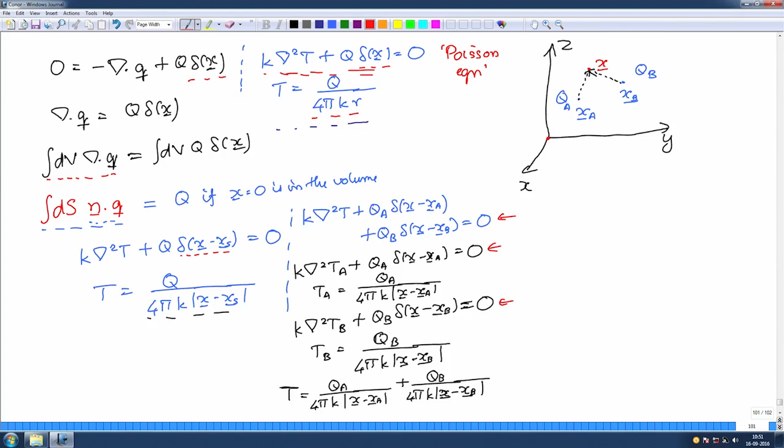We had considered a specialized kind of source, which is a point source. That point source is located at a point, the volume of which goes to 0 in such a way that the energy generated per unit time is a constant. So, a source whose volume goes to 0, and if the energy generated is a constant, the flux has to go to infinity.

We had defined the delta function previously. The delta function is defined such that delta of x is non-zero only at x equal to 0, and it is equal to 0 everywhere else. The integral of this delta function over the entire volume has to be equal to 1. So it is an idealization of a function which is non-zero only at the origin, where x is between minus h by 2 and plus h by 2, y is between minus h by 2 and plus h by 2, and z is between minus h by 2 and plus h by 2, and within this region it has an amplitude of 1 over h cubed.

There are other ways of expressing the delta function as well; this is the simplest way. However, regardless of how you express the delta function, the solutions that I get for this delta function end up being the same.

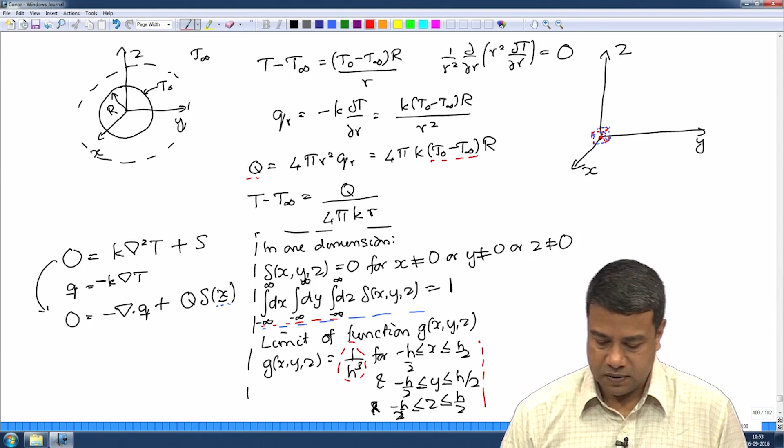So I showed you that if we have an equation of the form k del square T plus q delta of x equal to 0, the solution of that is temperature equal to q by 4 pi k r. So this temperature field is the solution for the Laplace, or rather the Poisson equation - a Laplace equation with an inhomogeneous term. I had shown you that when the source is at the origin, you get q by 4 pi k r, where r is the distance from the origin.

When the source is at some other location, you just have to take the distance of the observation point from the source point, the vector distance - that in this case was equal to the magnitude of the vector x minus xs, where x is the observation point and xs is the source point.

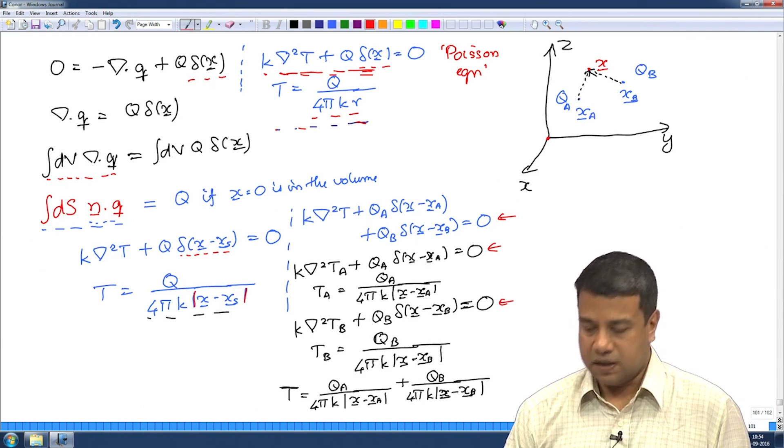I had shown you superposition. If you have two different sources, you can find out the temperature due to each of those sources individually and add them up, and you will get the temperature due to the two sources together. That works only when the sources are in the form of delta functions, when you have point sources of infinitesimal volume. In general, if you have sources of finite volume, that principle does not apply in general.

You have to keep the solid boundaries the same. So therefore, this source of the delta function type is a special source, and that is the reason it is useful for getting these equations.

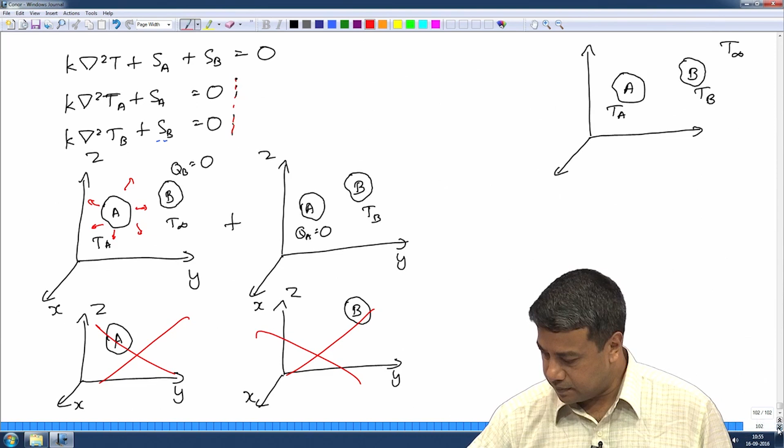So I showed you that for two sources you can get a solution by superposition. Now, what if you had some volumetric source? You had some region in space where let us say some reaction was generating a certain amount of heat.

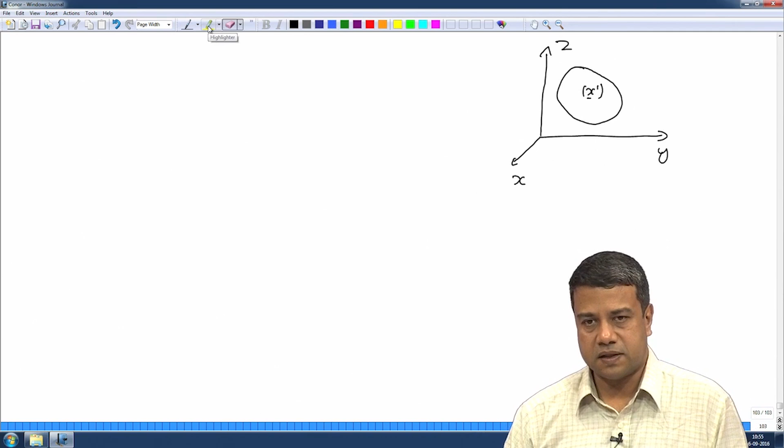That heat being generated per unit volume, per unit time, I will consider as q of x prime. I should be careful here because I have used capital Q for energy per unit time, so rather than using that, I will use a different notation: I will consider this as some source S of x prime, that is the energy generated per unit volume per unit time.

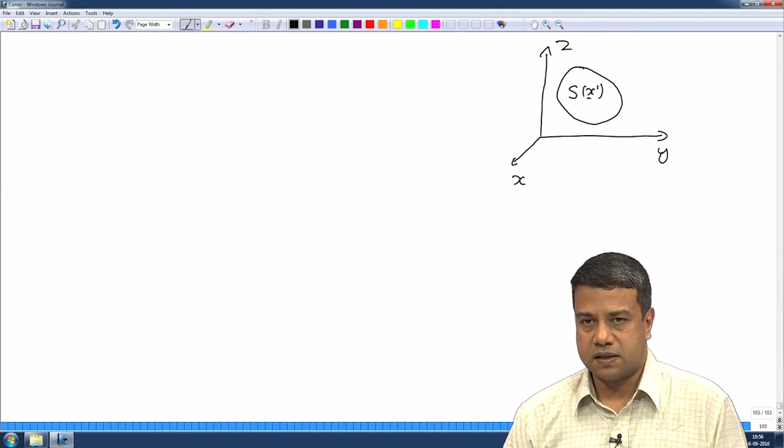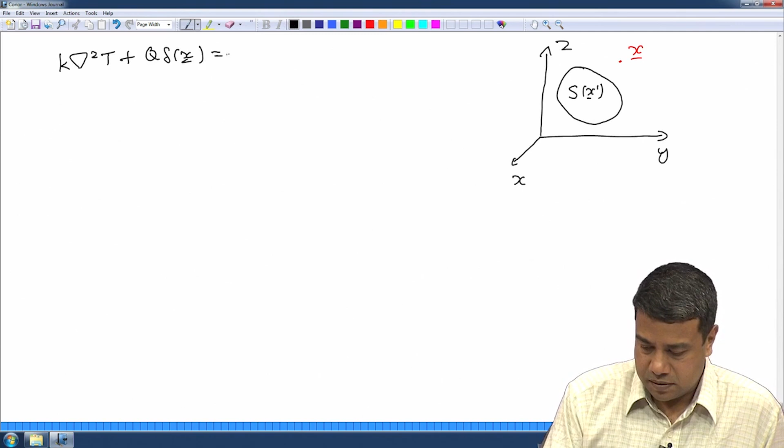And I want to find out what is the temperature at some observation point x. That observation point could be within the source or outside, it does not matter. So how do I do that? I already have a solution for a point source. That solution is T equal to Q by 4 pi k - let me write this as a source point.

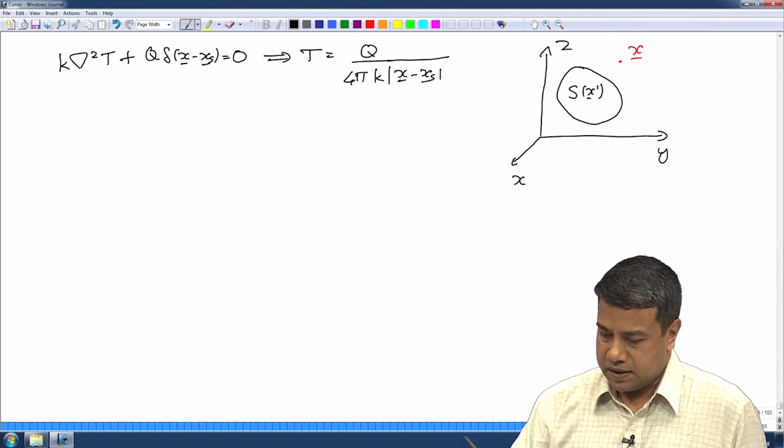So, that is the temperature field for this. What I can do is take this object and divide it into a large number of small volumes.

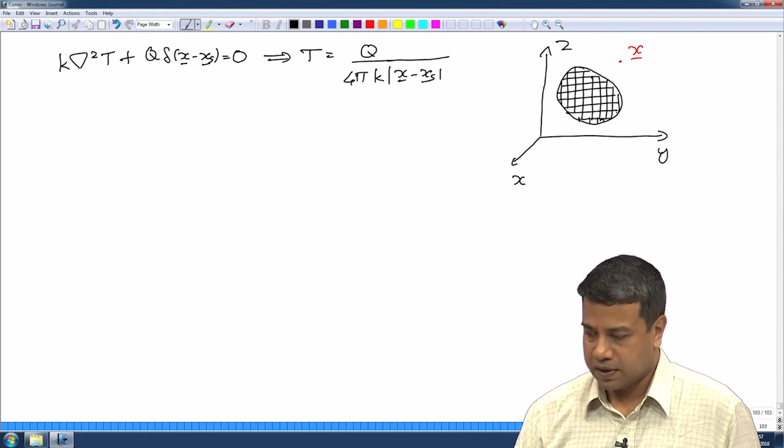The volumes can be defined with centers at delta V1, delta V2, etc., delta Vn, divided into a large number of volumes. I label them as 1, 2, 3, 4, 5, etc. The centers are at locations x1 vector, x2, up to xn.

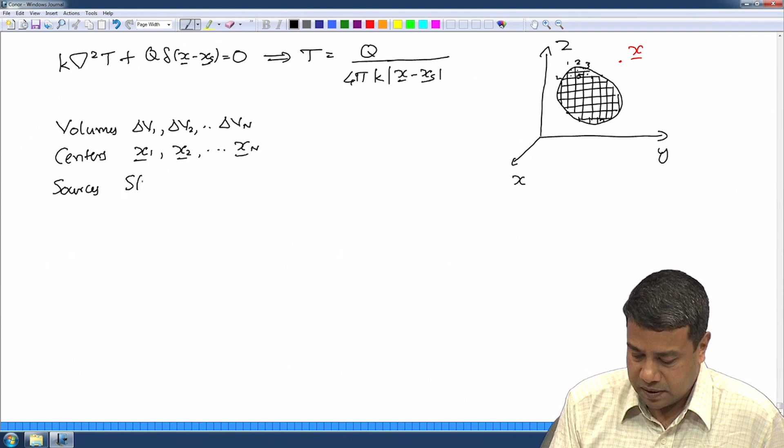So, the sources within this volume are going to be of the form S at x1 delta V1, S at x2 delta V2, S at x3, and so on.

So, those I can consider to be point sources at the centers of each of these volumes. If the volumes are small enough, the fact that you are combining the entire source at its center does not affect the problem, because the extent of the volume is much smaller than the distance from the observation point of each of these. So, this is effectively a point source.

Once I have defined it this way, I can straight away write down the total temperature field. I just have to add up the temperatures due to each one of these point sources. So, the total temperature field will be equal to summation over all I equal to 1 to n of delta V I into S of x I.

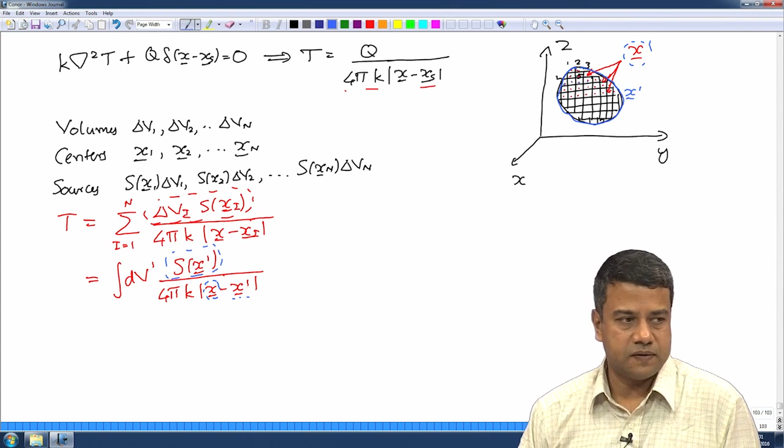Here x is the observation point, and x prime is the source point, the location on the source. You are integrating over x prime, which is over the entire volume of the source. This s is a function of the source point, and the integral is over the source point, and from that you get the value of the temperature at the observation point x.

So, provided the source is specified, you can get the temperature field at any observation point by using this expression, for any distributed source, for any finite object. So recall that we started off trying to solve for the temperature, k del square T plus S of x equal to 0. That was the differential equation for the temperature we were trying to solve, the Poisson equation with an inhomogeneous term. Using this delta function construction, we have managed to get a solution for that.

T is equal to the integral dv prime S of x prime by 4 pi k into x minus x prime. This is an integral relation. This gives us, on the left side, the temperature at the observation point x as a function of the source location and the source strength, for a distributed source. So this is effectively the integral equation that corresponds to this differential equation. There is a solution of this differential equation, and you can use this formulation to find the temperature due to any source.

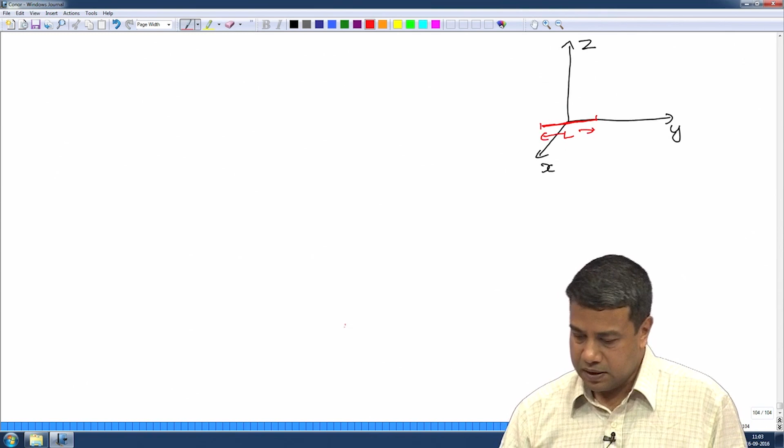Okay, so if I have a wire of total length L, extending from y equals minus L by 2 to y equals L by 2, this is generating some heat. So this is a finite wire. You can think of it as something like an immersion wire, for example, which is immersed in a fluid.

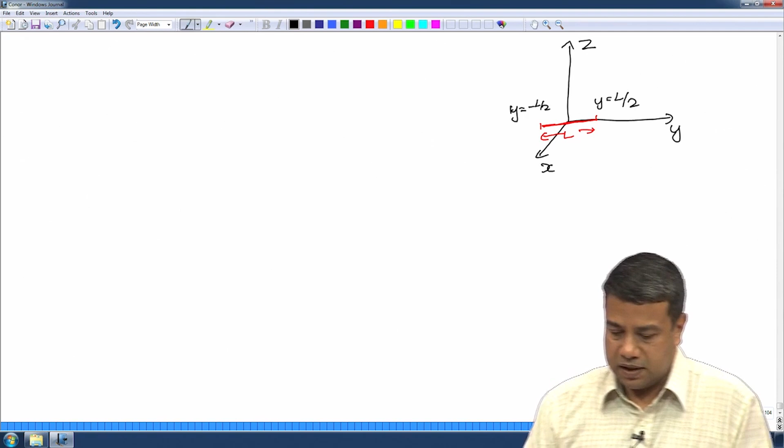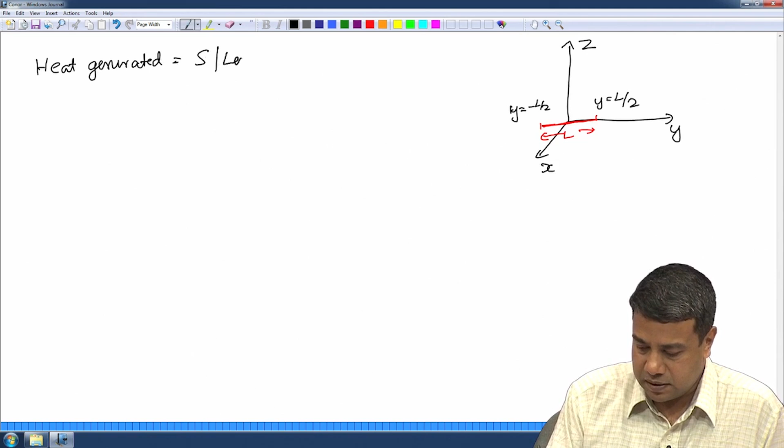It is generating a certain amount of heat, and you would like to find out what is the temperature field around this due to the presence of this wire. The heat being generated is equal to S per unit length of wire per unit time. That is the heat that is being generated. This wire is of infinitesimal thickness, so it has 0 thickness in the x direction and 0 thickness in the z direction, and it is a certain amount of heat generated per unit length.

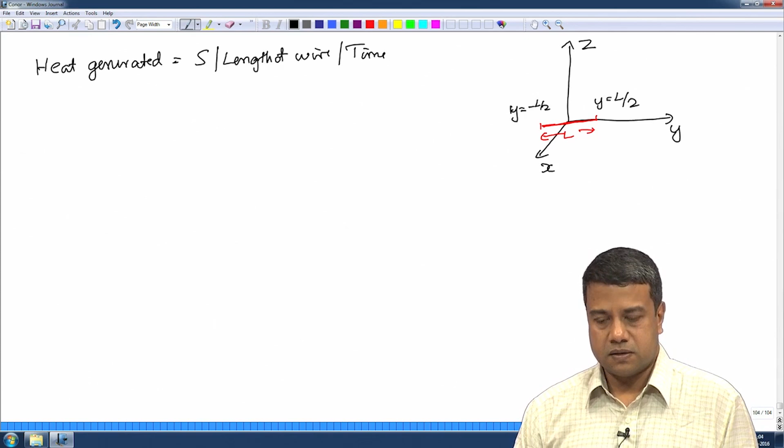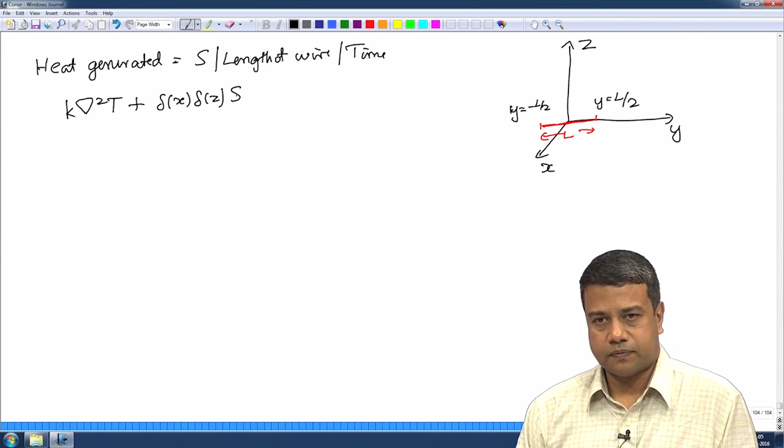So we have to solve the equation k del square T plus... this has infinitesimal thickness in the x and z directions, so this is delta of x, delta of z, times S, is equal to 0, where S is non-zero only for y is equal to minus L by 2 to y equals plus L by 2. So S is source per unit length of wire.

It is confined only to the y axis. That means it is non-zero only when x is equal to 0 and z is equal to 0. Otherwise it is 0. So it is non-zero only when both x and z are 0. Therefore, I have delta of x, a function that is non-zero only when x is 0, and delta of z, a function that is non-zero only when z is equal to 0.

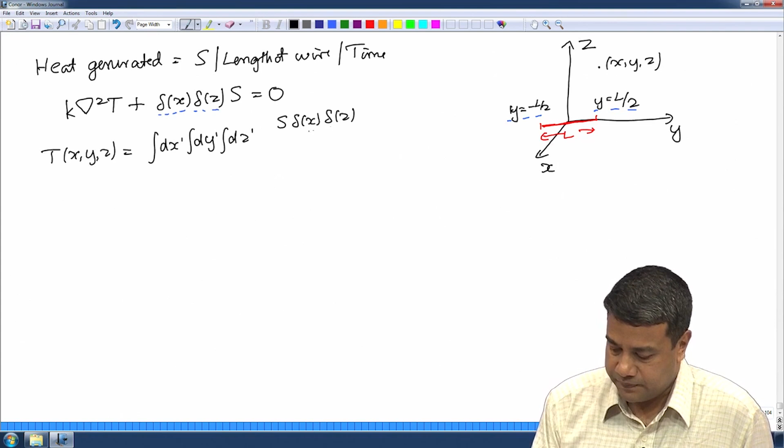And I want to find out the temperature at some observation point x, y, z. So therefore I need the inverse of this equation, which I had told you: T of x, y, z is equal to the integral over the source point, that is integral dv prime that I had in the previous example. The source s times delta of x, delta of z, primes here - these are the source locations.

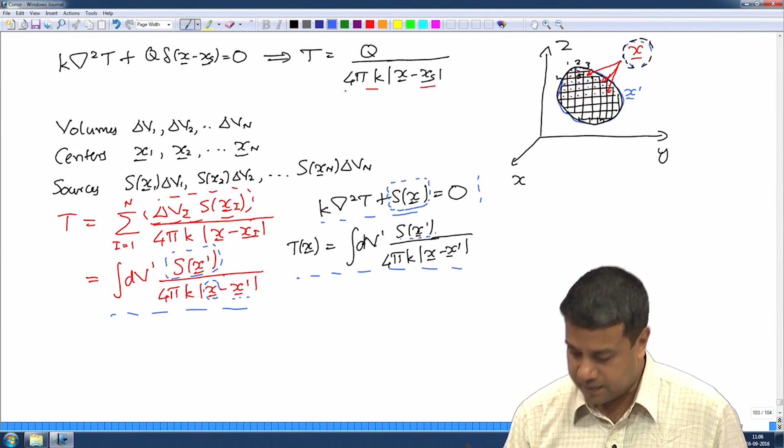Recall that in the previous lecture, I had k del square t plus s of x is equal to 0. The solution for that is integral over dv prime of s of x prime divided by 4 pi k into x minus x prime. Divided by 4 pi k into what is x minus x prime - this is going to be the distance between x and x prime.

So this square root of x minus x prime the whole square, plus y minus y prime the whole square, plus z minus z prime the whole square - that is the distance between the 2 points. That is what is meant by the magnitude of the vector x minus x prime. So this will be x minus x prime the whole square, whole taken the square root of. So that is going to be the expression.

So x goes from minus infinity to infinity, y from minus L by 2 to L by 2, and z goes from minus infinity to infinity. So that is the extent, that is the temperature field.

Now we know that integral minus infinity to infinity dx prime times delta of x prime times any function of x prime is equal to the value of that function at x prime equals 0. That was one of the properties of the delta function. It is 0 everywhere except where x is equal to 0. The integral is 1, and if you multiply this delta function by any function f of x and integrate it from minus infinity to infinity, the delta function is not 0 only at x is equal to 0. So this will pick out the value of the function at x is equal to 0.

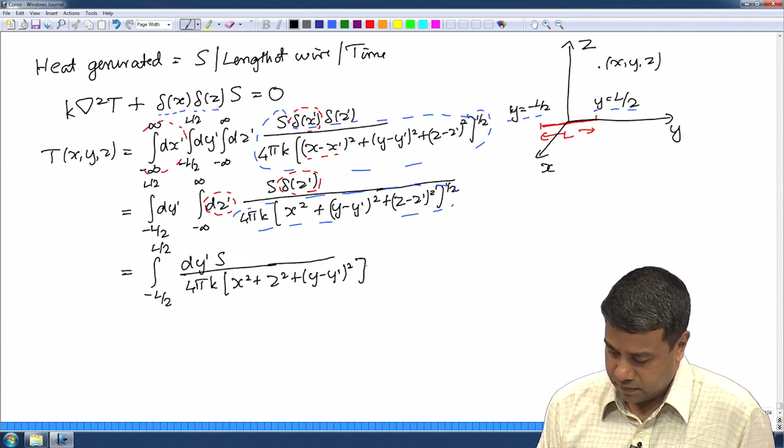Now, this is a rather complicated expression. What we can do, for example, is to simplify it by taking the value at the location z is y is equal to 0 along the central plane. I will take the value of the temperature along the central plane, at the location y is equal to 0. In that case, the temperature becomes T of x, 0, z is equal to s into log of L by 2 plus root of...

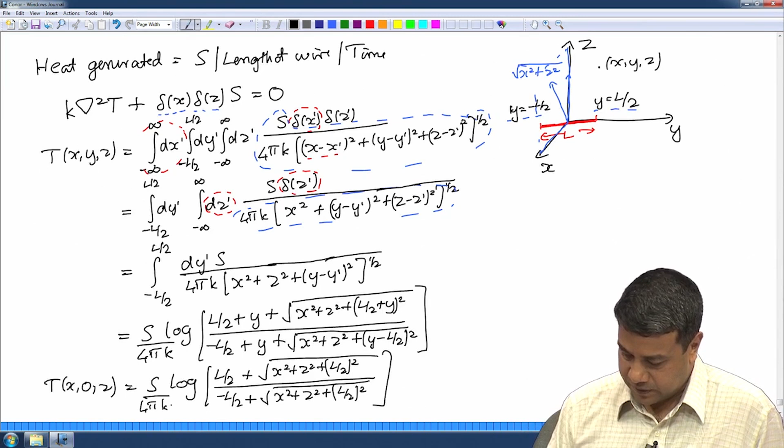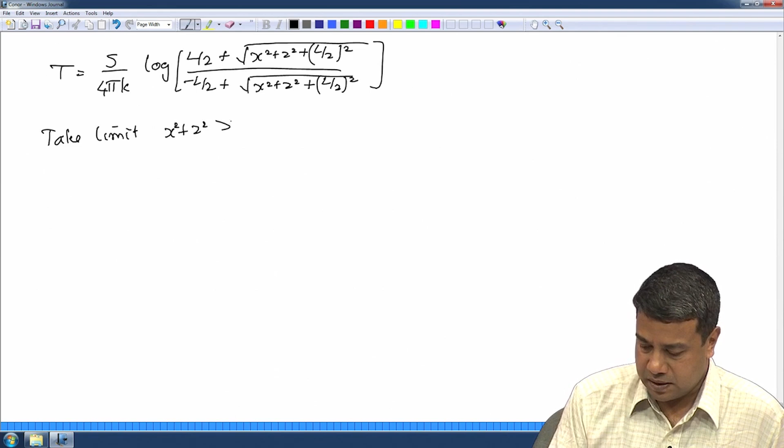If we take the limit where the distance from the source, x square plus z square, is much larger than L square, the length of the wire, this distance is much larger than the length of the wire, and I have to do a series expansion in the small parameter L by 2. I have to expand this entire term in the series expansion in L by 2.

And now I can do a series expansion because this L is much smaller than root of x square plus z square. So, these numbers are small parameters compared to 1. And if you do that, you can actually neglect this term because it is quadratic. I get 1 plus x by 1 minus x. The result of that just turns out to be equal to S by 4 pi k, into L by root of x square plus z square. That is what I would get by expanding out this log function in a binomial series.

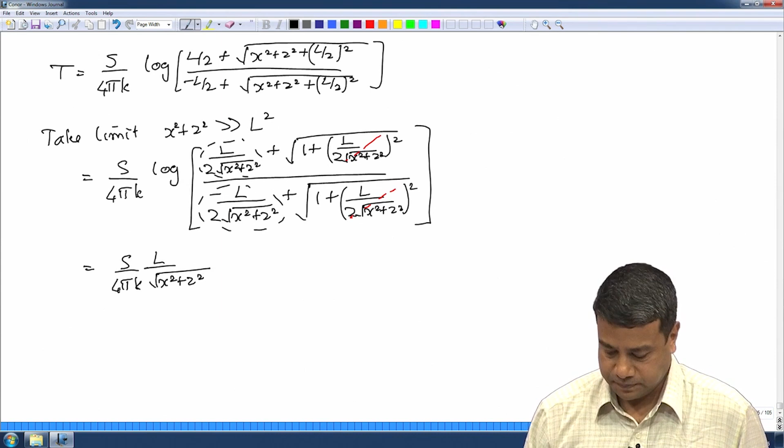Recall now along the plane that we had in the xz plane, where the wire was along the y axis. Along this plane we had done an expansion, where the distance was root of x square plus z square. This was large compared to the extent of the wire L. That was the limit that we were considering.

In that case, we get a solution which is basically equal to the total heat generated per unit time. S was the heat generated per unit length per unit time of the wire. So, S times L is the heat generated per unit time, divided by 4 pi k into the square root of x square plus z square, which is basically the distance from the origin.

That was the solution that we had got for the point source, q by 4 pi k r.

If the distance from the source point is much larger than the extent of the source, the source point actually looks like a point source of source strength S times L. So as the distance from the source becomes much larger than the spatial extent of the source, it basically looks like a point source. Once the spatial extent is very small, you get back the same result that you would have got for the point source.

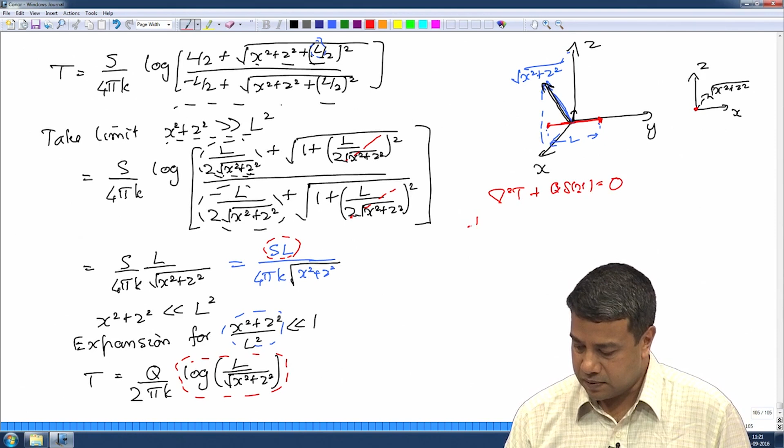The point source in 2 dimensions has a solution which is logarithmic in the radius. You can solve explicitly the point source in 2 dimensions by taking the 2-dimensional version of the equation: del square t plus q delta of x equals 0. In 2 dimensions, if it is axisymmetric, you get 1 over r, d by dr of r, partial t by partial r, plus q delta of x equals 0. The solution to this turns out to be a logarithmic function, which you can solve quite easily and verify.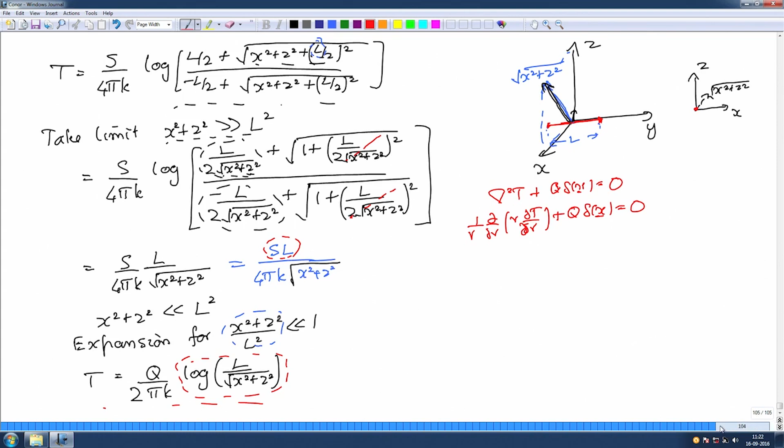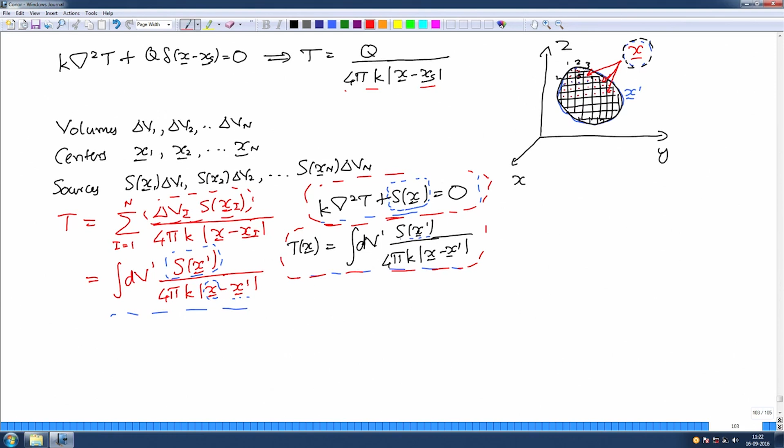So in the two limiting cases, we get the correct solutions for this case of a wire. And of course this can be generalized - in this case we took a one-dimensional wire, but you can take a surface or a volumetric object. For all of these you will get solutions just by inverting this equation - the differential equation is basically this integral equation. We saw that by expressing it first as a point source and then generalizing it to a volumetric source. We will see a little bit more about this.

This was all in an infinite domain. What do you do when there are boundaries? We will look at that in the next lecture, then come back to the original point that I had said - what do those spherical harmonic expansions mean? We will continue that in the next lecture.